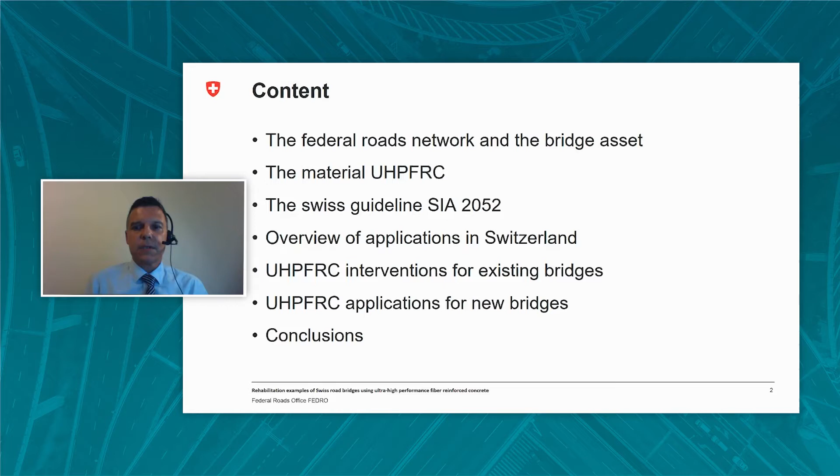I will start with a short description of the Federal Roads Network and bridge assets. Subsequently, I will present briefly some characteristics of the ultra-high performance fiber reinforced concrete as a building material and make a mention of the related Swiss standards. Thereafter, I will present some case studies concerning interventions in which this material was used for rehabilitation purposes. Finally, before arriving at the conclusion, I will present some perspectives of the use of this material for new structures.

In the illustrated map, you may see in green color the existing national road network, and in violet, the 400 kilometers of cantonal roads which were joined to the national network in 2020. The total national road network is thus actually 2,254.5 kilometers. In blue, the remaining parts to be constructed, which is about 33 kilometers. It is a quite complex network due to the particular topography of Switzerland and comprises 4,314 bridges, including flyovers and underpasses, as well as 320 tunnels.

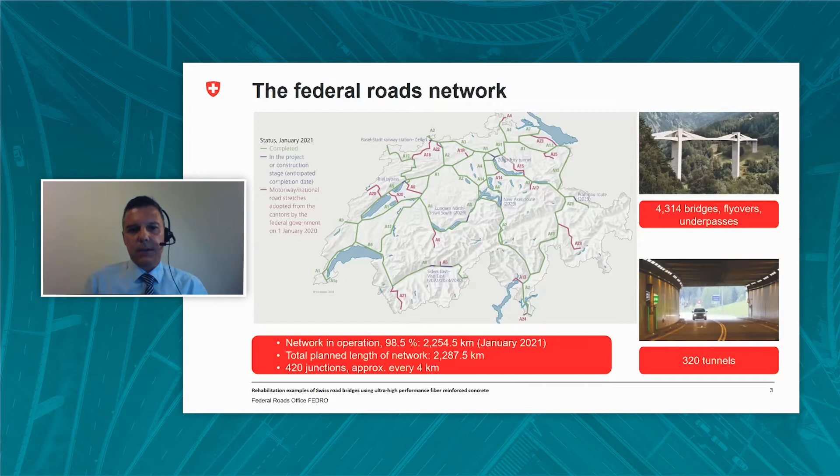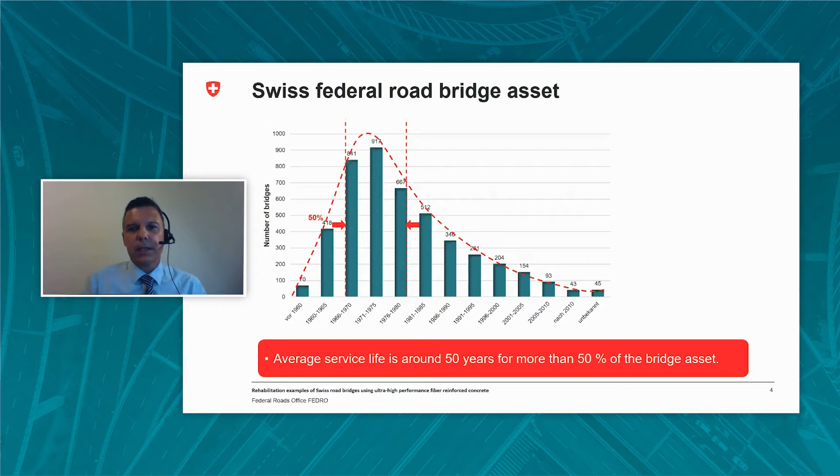Now, most of the Swiss bridges were constructed in the period from the mid-60s to the late 70s, so their average service life is around 50 years. Degradation process, increase of traffic load, especially heavy traffic load, as well as evolution of codes make it necessary to proceed regularly to important rehabilitation projects for several of these bridges. With an annual investment of around 1% of the replacement value, the bridges are kept in a good or acceptable condition. Concrete is the predominant building material in Switzerland for our road bridges.

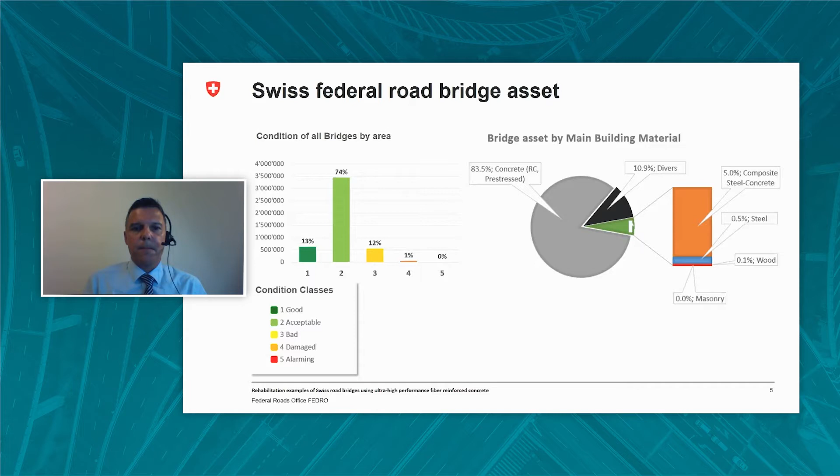83.5% of the total area of the bridge decks is associated to reinforced concrete or prestressed concrete bridges. However, despite the advantages that have led to the use of concrete as the main building material, the issue of durability was not thoroughly examined or taken into consideration in the past. A combination of factors such as exposure to corrosion, defective conceptual details, particularly at the abutments, presence of alkali aggregate reaction, carbonation, frost, use of de-icing solutions in winter period, and others have resulted in some cases in important damage, which normally should not occur during the design service life of a bridge.

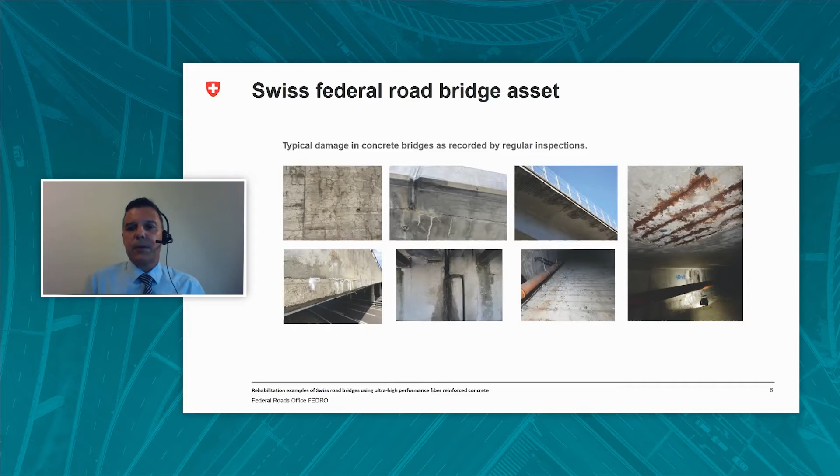For this reason, other materials, more efficient and more resistant to environmental influence, have been sought since the 90s. Such a promising material is the ultra-high performance fiber reinforced concrete. Now, this material is neither a concrete nor steel, but an advanced composite cementitious material with specifically tailored properties. That's the reason why several experts call it ultra-high performance fiber reinforced cementitious material instead of ultra-high performance fiber reinforced concrete. I rather agree, however, in this presentation I will use the initial nomination in English.

Now, the cement content is more than 2 times higher than for a normal concrete. For instance, for an ordinary concrete, the cement content is between 250 to 400 kilograms per cubic meter, whereas for the ultra-high performance fiber reinforced concrete, the cement content is 700 to 1,100 kilograms per cubic meter. It contains silica fume, which fulfills 3 functions. It fills voids between cement grains, it enhances their rheological characteristics, and forms hydration products by pozzolanic activity. Thus, the mechanical strengths are increased and microstructure and compacity of this material are enhanced.

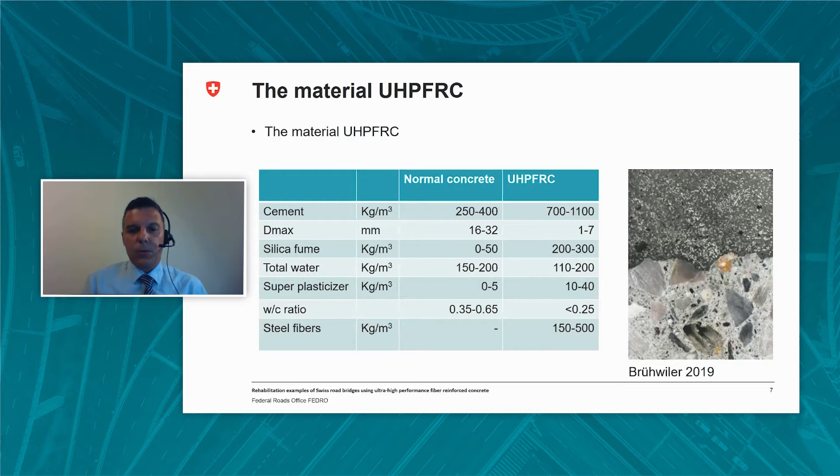The water-to-cement ratio in ultra-high performance fiber reinforced concrete is less than that of a normal concrete. In an ordinary concrete, the water-to-cement ratio is between 0.35 to 0.65, whereas in ultra-high performance fiber reinforced concrete, the water-to-cement ratio is less than 0.25. So, due to the low water content, superplasticizers are essential for the workability, and they are in much higher content than that for a normal concrete. A significant difference of the composition of this material in comparison to the normal concrete is the absence of aggregate. Quartz sand is used with particle size less than 1 millimeter in this material, whereas in ordinary concrete we have aggregates which can reach 32 millimeters. This is why we should not call it a concrete but a cementitious material.

Ultra-high performance refers principally to improved mechanical strengths, structural toughness, and durability. The typical behavior of ultra-high performance fiber-reinforced concrete in a uniaxial state of stress in comparison to other concretes is shown schematically in this slide. The diagram on the left shows the typical response in uniaxial tension.

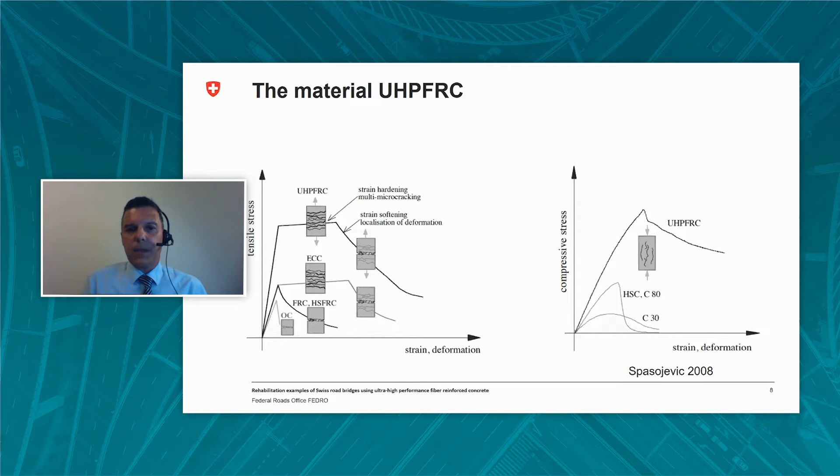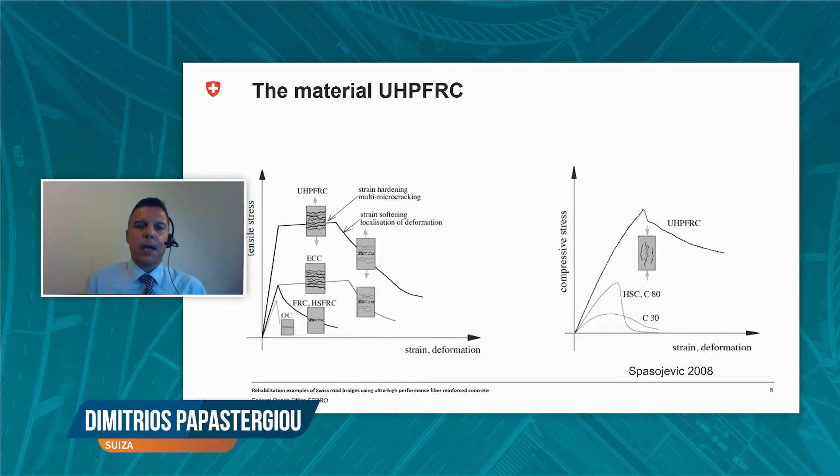In the left diagram, OC are the initials for the ordinary concrete. FRC are the initials for the ordinary concrete with fibers. HSFRC are the initials for the high-strength concrete with fibers, where ECC stands for engineered cementitious composites. As we can see, ordinary concrete has an abrupt failure in tension, whereas the concrete with fibers have a strain branch, but they don't present any strain hardening.

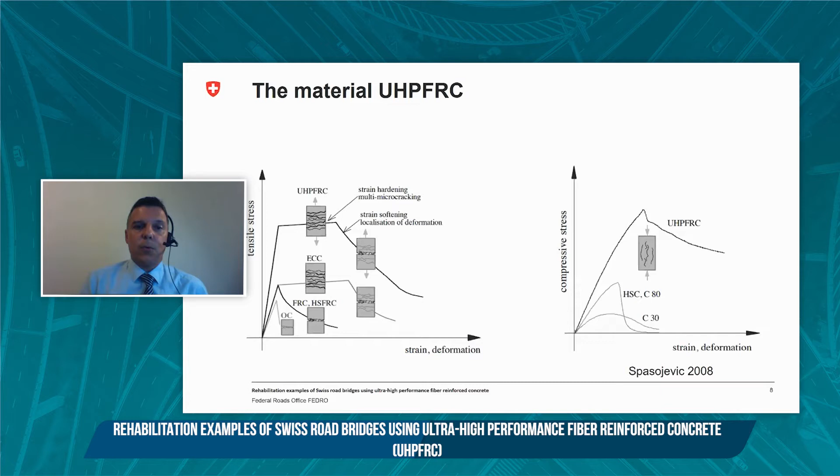The engineered cementitious composites and the ultra-high performance fiber-reinforced concrete are distinguished from other concrete with fibers as materials exhibiting strain hardening in tension. Moreover, for ultra-high performance fiber-reinforced concrete, the resistance in uniaxial tension is more than double in comparison with that of other concretes with fibers. The diagram on the right depicts the response in uniaxial compression. Ultra-high performance fiber-reinforced concrete is a material with a cement matrix of a characteristic compressive strength in excess of 150 megapascal, which is more than double that of a high-strength concrete.

Now, let's see in more detail the structural response in tension of ultra-high performance fiber-reinforced concrete and how it is different from that of ordinary concrete with fibers. For ultra-high performance fiber-reinforced concrete, in the first part of the curve until point A, the stress rise is quasi-linear and elastic until the cracking strength. After cracking, strain hardening takes place until point B, with post-cracking strength being higher than that of the cracking strength. Up to point B, multiple cracks are formed during the strain hardening.

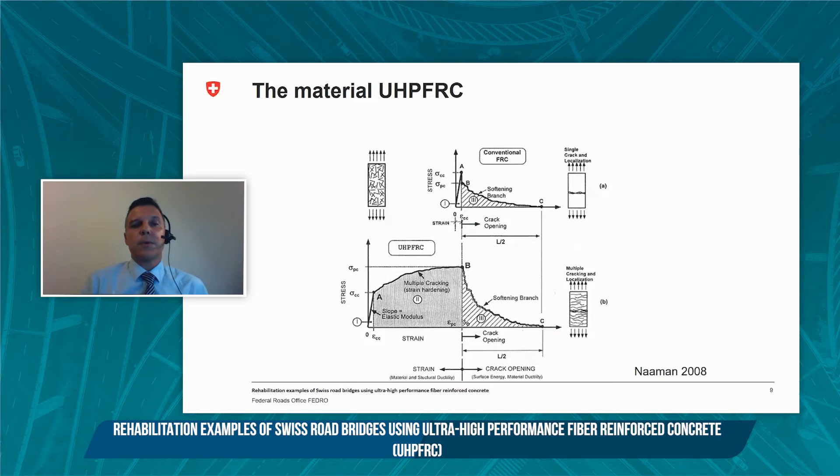fibers. They are characterized by the material, by its mechanical properties and their geometry. In order to enable the transfer of force with a small crack opening and to sustain tensile forces without breaking, a high modulus of elasticity and high strength are required. The modulus of elasticity of steel fibers is 200 gigapascal, and strengths are in the range of 1,000 to 3,000 megapascals, with a deformation at failure of about 3 to 4%.

Fiber content is usually expressed in terms of fiber volume fraction, representing the ratio between the fiber volume and the material volume, the latter being the matrix with the fibers. Fiber quantity varies in different types of this material, usually in the range of 1.5 to 2.5%, and in certain cases, for specific applications, it can reach up to 6%.

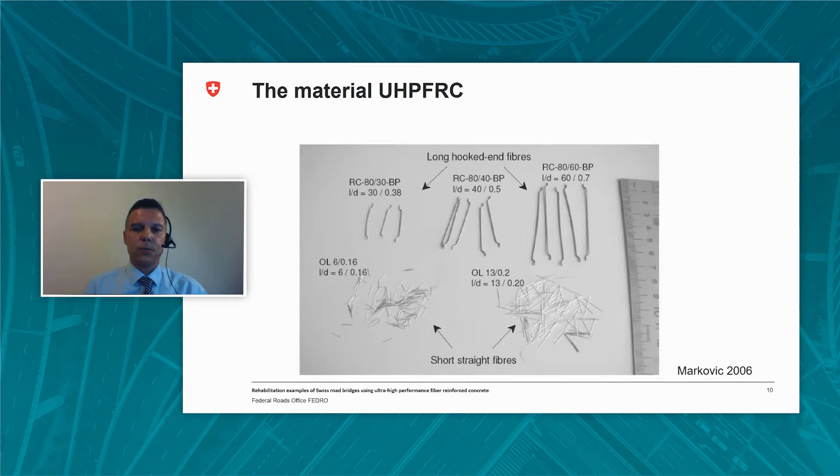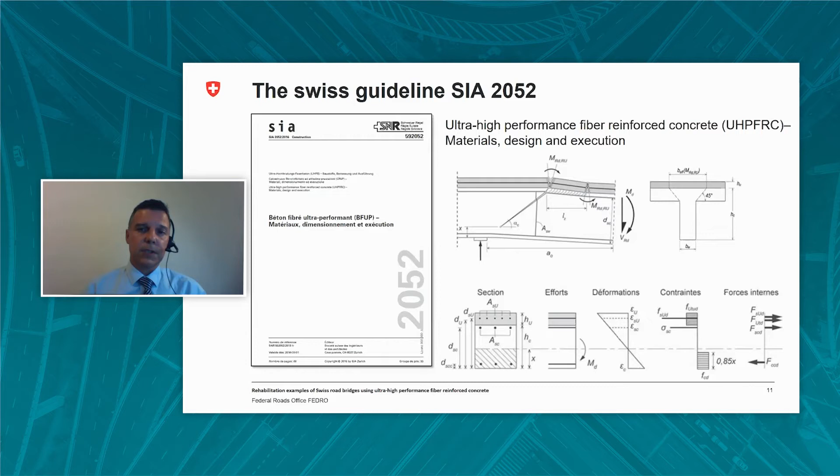For applications using ultra-high performance fiber-reinforced concrete, we use in Switzerland the recommendations of the Swiss rule SIA 2052 from 2016. This document does not have the status of a code yet, so it does not have an obligatory character. It handles several issues, such as the material properties and the constitutive laws. It also provides guidelines for design, such as shear, bending moment, and others. This manual, which is currently under revision, also provides constructional features and dispositions, such as the sealing of the working joints. It defines the tests which are required to verify the material properties.

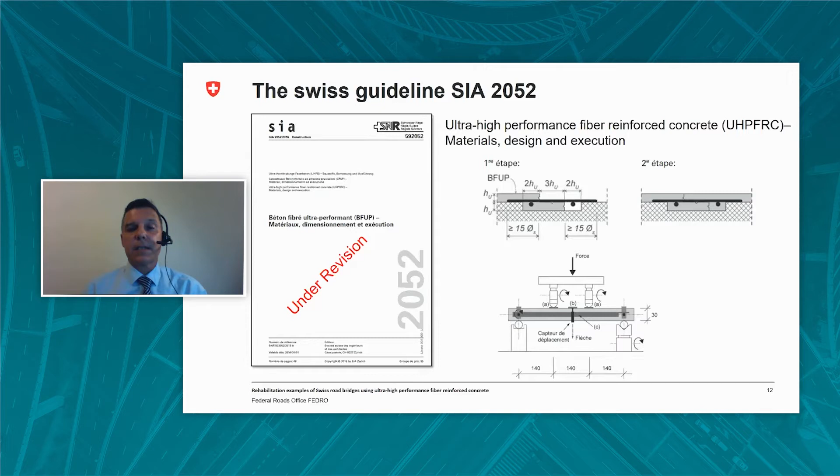A very useful piece of information is the criterion for the sealing properties of the ultra-high performance fiber-reinforced concrete. Based on experimental investigation, it was found that as long as the tension strain in this material remains in the serviceability limit state lower than 0.1%, 1 to 1,000, the sealing properties are maintained. This is of extreme importance since it allows, when designed so, avoiding the use of complementary layers of traditional sealing for the decks of bridges and thus avoiding unnecessary costs and delays during an intervention.

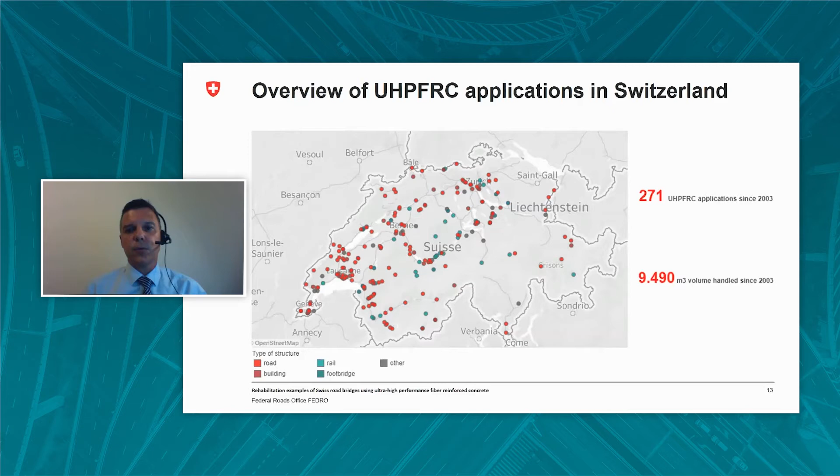Since 2003, Switzerland counts more than 270 recorded applications with this material. This corresponds to a total volume of more than 9,490 cubic meters. It's worth mentioning that more than 80% of these applications concern rehabilitation or retrofitting projects of road bridges, federal and cantonal. In the following slides, I will present a few of those case studies. Now, the Chillon viaducts are two parallel highway reinforced concrete bridges, each carrying one direction, opened to traffic in 1969 and located on the shores of Lake Geneva near Montreux in Switzerland.

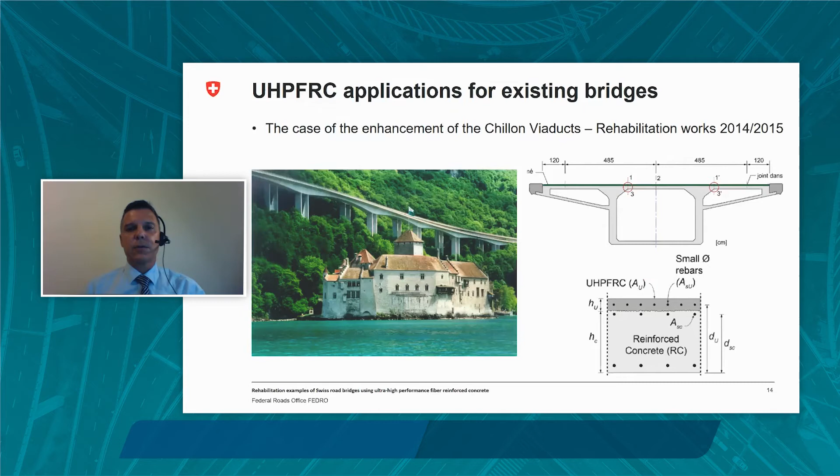They consist of variable height box girders by post-tensioning segmental construction with epoxy glued joints and spanning between 92 and 104 meters at a total length of 2,120 meters. In 2012, during rehabilitation works on the viaducts, early signs of the alkali aggregate reaction were discovered in the concrete. In later stages, this reaction could lead to deterioration of the concrete compressive strength, which would mean an insufficient structural safety for the resistance of the bridge at ultimate limit stage and even worse at serviceability limit stage.

It was thus necessary to develop a concept for rehabilitation and strengthening to protect the concrete from water ingress, slow down the rate of alkali aggregate reaction, and increase the ultimate resistance and stiffness of the deck slab and girder in view of potentially reduced strength and modulus of elasticity of the existing concrete. Such an intervention had to be cost-effective in terms of direct construction costs and also of user costs. It also had to preserve the form and hence respect the cultural value of the bridges.

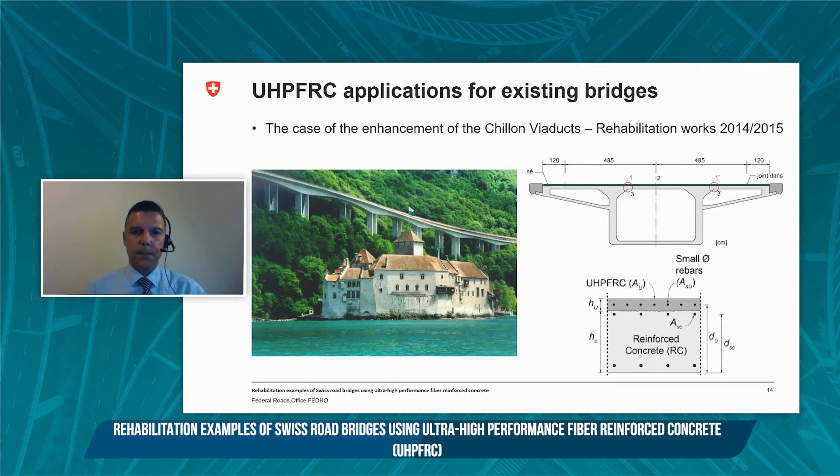The chosen strengthening concept was adding a layer of ultra-high performance fiber reinforced concrete, additionally reinforced with steel rebars in the two directions, longitudinal and transversal, also serving as a waterproofing layer. The new 45 millimeter thick layer on the bridge deck provides an effective and significant improvement of the structural performance of these viaducts. By casting one layer of ultra-high performance fiber reinforced concrete on the deck slab with rebars in the transverse direction and in the longitudinal direction, the following beneficial effects were achieved.

Increase of the deck slab's ultimate resistance in the transverse direction in bending and in shear. Increase of the deck slab's stiffness to enhance the serviceability of the slab and the fatigue safety of the existing reinforced concrete elements in view of future high traffic demands in number of vehicles and axle loads. Increase of the hogging bending moment resistance and the stiffness in the longitudinal direction of the box girder. Provide waterproofing to protect the existing concrete of the slab from water ingress and thus limiting the further development of the alkali aggregate reaction. Limit duration and cost of the intervention by realizing all the above listed requirements and structural factors by casting of just one layer of ultra-high performance fiber reinforced concrete.

For this purpose, a machine was developed specifically for the casting application of this material, and the quantity of it was 1,125 cubic meters for each of the 2 kilometer viaducts. The casting took place in July 2014 for one of the bridges and in June 2015 for the other bridge. And the intervention cost was 200 euros per square meter of deck surface, 50% of it being the cost of the material itself.

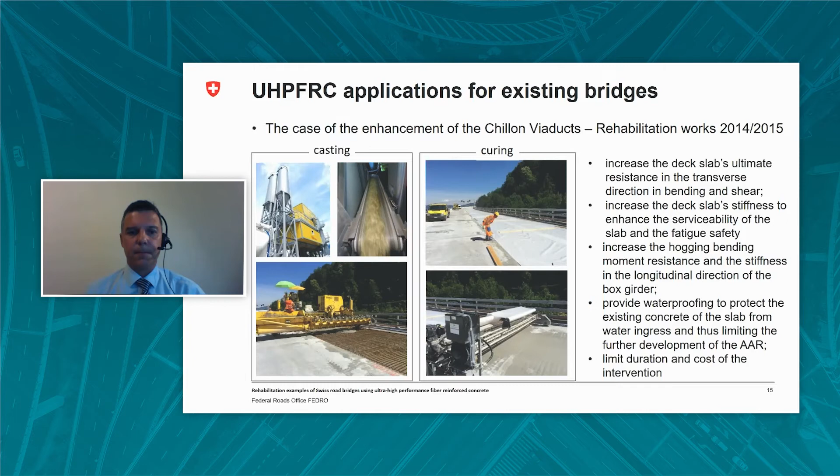Now, let's see more in detail the obtained increase of the bending and the shear resistance of the slab in the transverse direction. The Chillon viaducts deck slab has a total thickness of 180 millimeters. The transversal 16 millimeter diameter top steel rebars are placed at the height of 152 millimeters from the intrados, and they are spaced at 12.5 centimeters. The center of these rebars is at 60 millimeters only from the top of the concrete.

Considering now a future reduced strength due to the alkali aggregate reaction of the concrete limited to 20 megapascal, the maximum resistance for the section 1 prime here on the cantilever is equal to 165 kilonewton meter per meter. This is 73% higher than the resistance of the reinforced concrete itself in the stage before the reinforcement. For positive bending moment, the layer of the ultra-high performance fiber reinforced concrete is in compression and mainly contributes to the resistance by reducing the height of the compression zone and thus increasing the static height. For the case considered here, the positive bending resistance at the section here in the middle of the slab is increased by 33%.

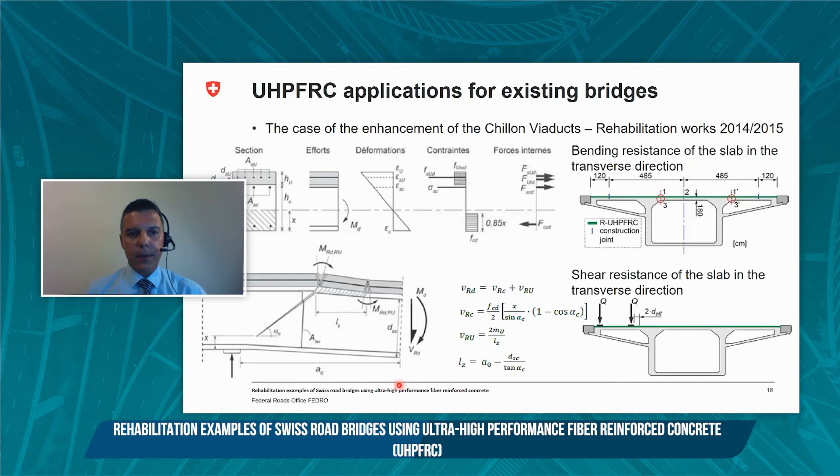The length of this zone is estimated from the mouth of the inclined crack to the position of the concentrated load. It thus depends on the angle of the inclined shear crack and on the length of the shear span. For the present slabs, the shear span corresponds to the distance between the side of the concentrated load and the web of the box girder. It is equal to twice the effective flexural depth of the composite section, as shown here for the cantilever slab.

With an angle of the inclined crack estimated at 35 degrees, the shear resistance of the composite section is 265 kilonewton per meter. The contribution of the ultra-high performance fiber reinforced concrete to this resistance is about 1/3 of the total resistance. The study has shown that in this particular slab, the flexural failure mode is much more likely to occur, also in the case of shear-prone loading situation.

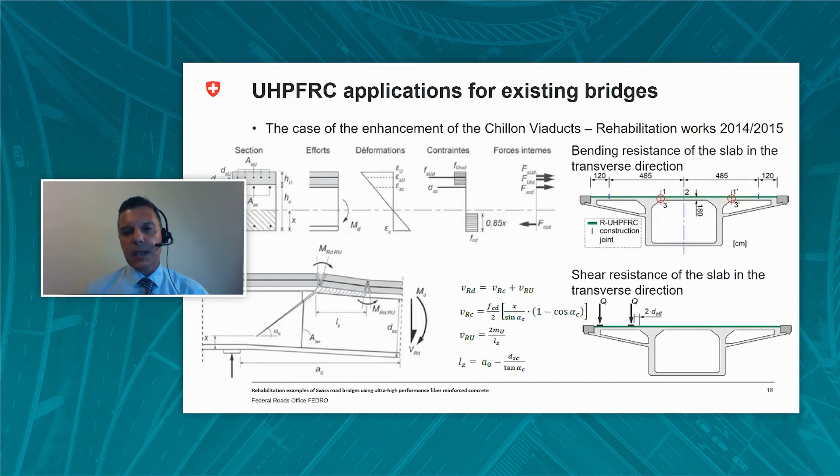Now, the aforementioned project of the rehabilitation of the Chillon viaducts by means of ultra-high performance fiber reinforced concrete received an excellence award from the American Concrete Institute.

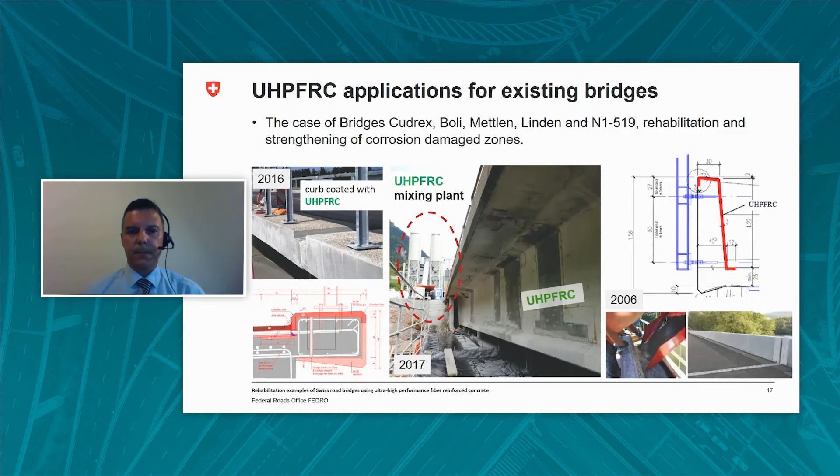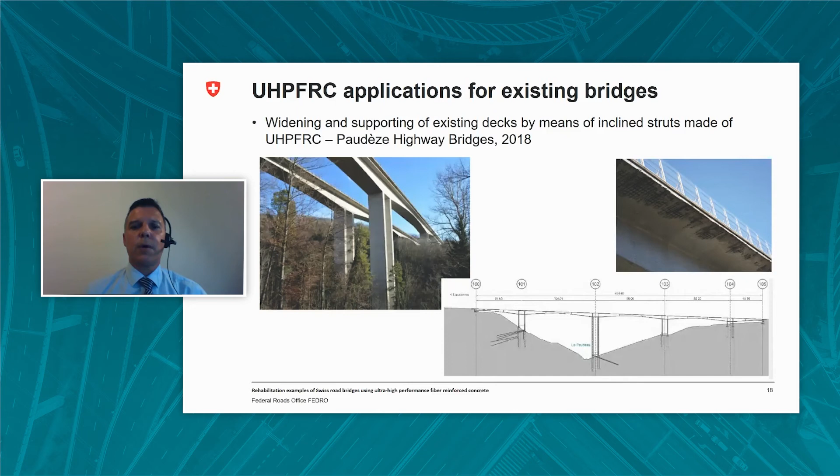The latest inspections have revealed several damages. More precisely, concerning the slab, the cantilevers were found to be in poor condition, with spalled concrete and corroded steel reinforcement on all edges. Furthermore, future requirements for diverting the traffic during important rehabilitation work on the highway necessitated widening of the deck. Any possible intervention also had to take into account the replacement of the curbs by concrete crash barrier walls for enhanced security against lateral shock.

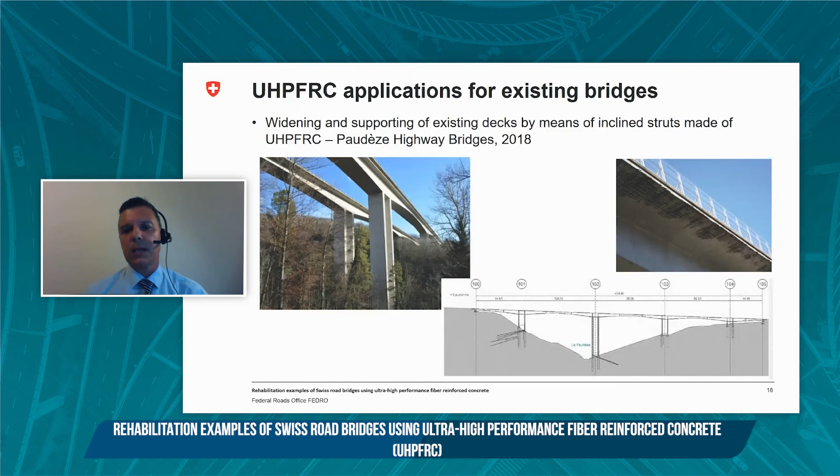The solution proposed was to widen the deck slab by ordinary reinforced concrete and support its widened cantilevers with struts, allowing to maintain the existing steel reinforcement in the slab and thus minimizing the intervention on the deck. The struts were made of ultra-high performance fiber reinforced concrete to minimize their weight and to avoid their future maintenance, which would be the case if they were made of steel. In total, 816 such inclined struts of 5 types were produced.

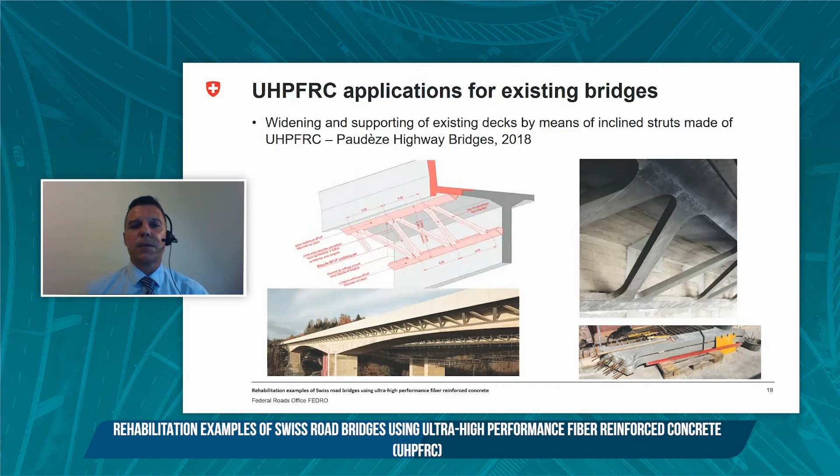The ultra-high performance fiber reinforced concrete struts were prefabricated, allowing thus to reduce their cost to 500 Swiss francs per unit, whereas the joints with the web of the longitudinal girders and the cantilever slabs were assured by cast-in-place ultra-high performance fiber reinforced concrete. Prior to construction, several configurations of the prefabricated struts were tested in the laboratory. This allowed to verify the allowed eccentricity during execution and mounting of the struts, which is found to be 1 centimeter.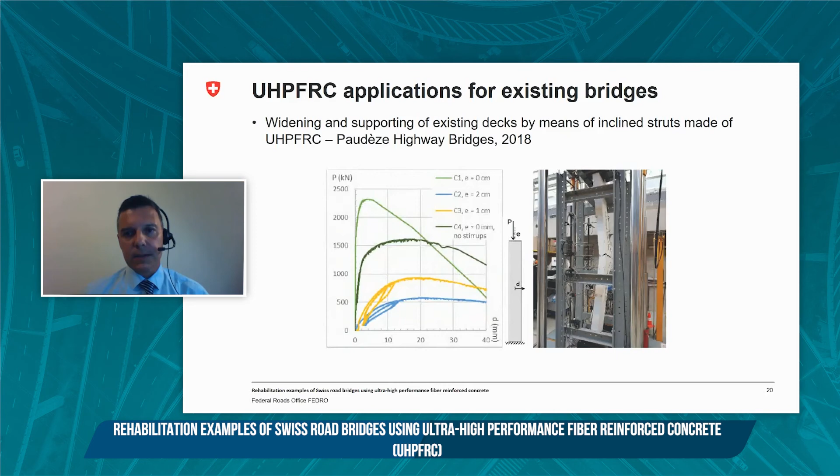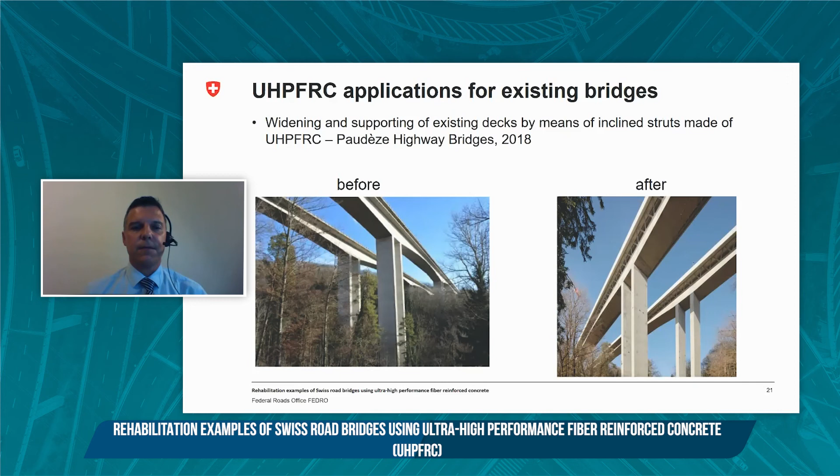After realization, it was apparent that the inclined struts of ultra-high performance fiber reinforced concrete maintained consistency with the existing concrete and the geometrical form of the existing structure, preserving thus the cultural value of it. Now, the previous example shows how ultra-high performance fiber reinforced concrete can be used as building material for structural members destined to rehabilitation interventions. Other such members are the crash barriers or curbs on the edge of the cantilever slabs.

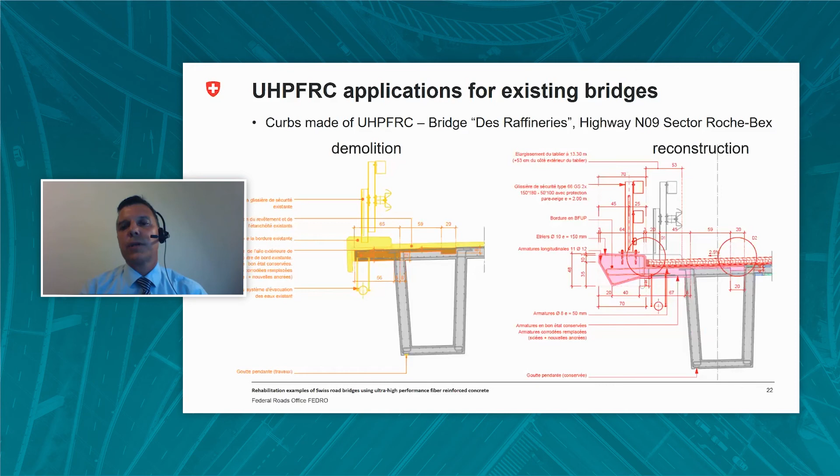This can be the case when, for instance, the existing curbs are highly deteriorated and need to be rebuilt partially or even totally. Applying a life cycle cost analysis, it can be proven that the use of ultra-high performance fiber reinforced concrete instead of ordinary concrete is more economic and technically efficient. This is the case of the reconstruction of the curb and the part of the slab of the bridge des Raffineries in the Highway 9 shown in this slide. The project is under call for tenders for works.

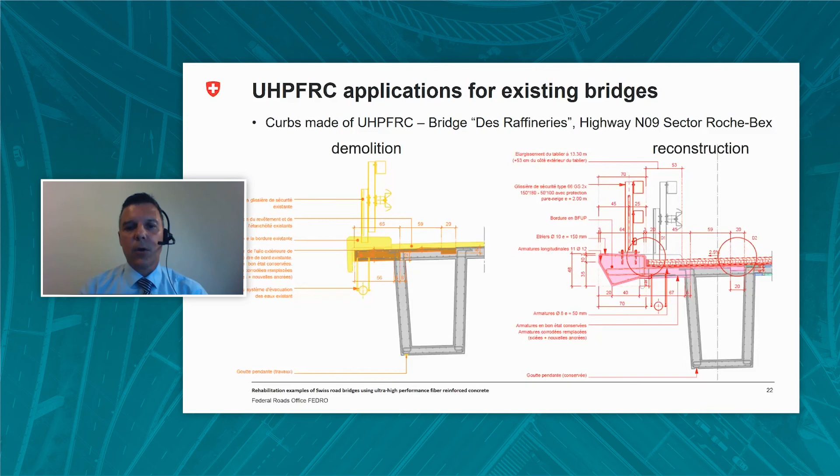Now, in the cases when retrofitting and rehabilitation costs are high, and the retrofitting results somehow questionable due to the missing precision of the quality and the state of the existing remaining materials, a replacement of a bridge by a new structure can be an alternative solution. It is the case actually of several overpasses on the Highway 1 between the cities of Lausanne and Geneva. These overpasses were built in the early 60s.

They present 3 spans, the main span supported by inclined struts. They are made of pre-stressed and reinforced concrete and are a type of integral bridges. The inclined struts and the deck are linked together, but also to the inclined abutments. Despite their very efficient static system, because it diminishes the span, these bridges are in a very deteriorated state due to defective sealing. Furthermore, they were not designed to stand the heavy traffic of today. Rehabilitation and retrofitting becomes extremely expensive in such a way that reconstruction seems to be a more efficient solution.

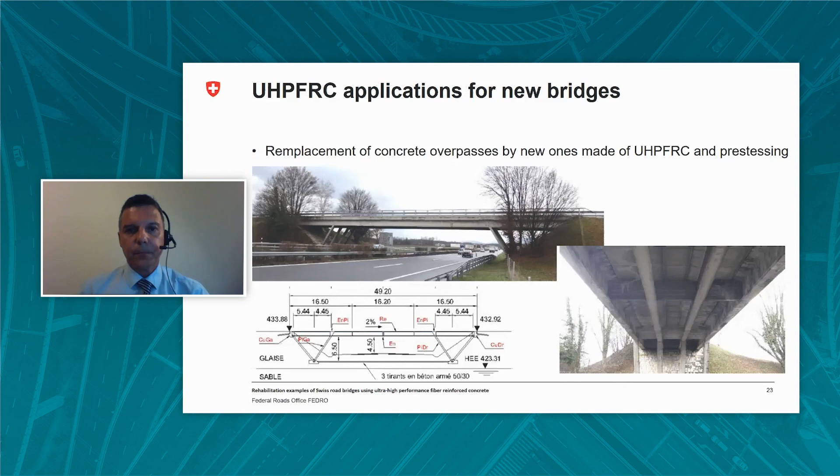In such a case, it's worth evaluating through a life cycle analysis whether the use of prefabricated bridges made of ultra-high performance fiber reinforced concrete can be the optimal solution. The slide shows here the concept of such a new overpass over the highway in the community of Bursins. The overpass consists of ultra-high performance fiber reinforced concrete girders with pre-stressing and abutments made of ordinary reinforced concrete. The new bridge is integral with one clear span of about 42 meters.

The project is still under development phase and should conclude to optimization of the ultra-high performance fiber reinforced concrete pre-stressed girders, since the preliminary design is by its nature somehow conservative and does not allow to take advantage of the enhanced mechanical properties of this material. For instance, the actual design contains stirrups, shear reinforcement, which can be avoided. Overpasses built elsewhere in the world, like in France, present ultra-high performance fiber reinforced concrete girders, which carry the shear force by the contribution of the shear resistance of this material and by the contribution of the post-tensioning. The detailed project of the aforementioned case study is expected to be delivered during 2022.

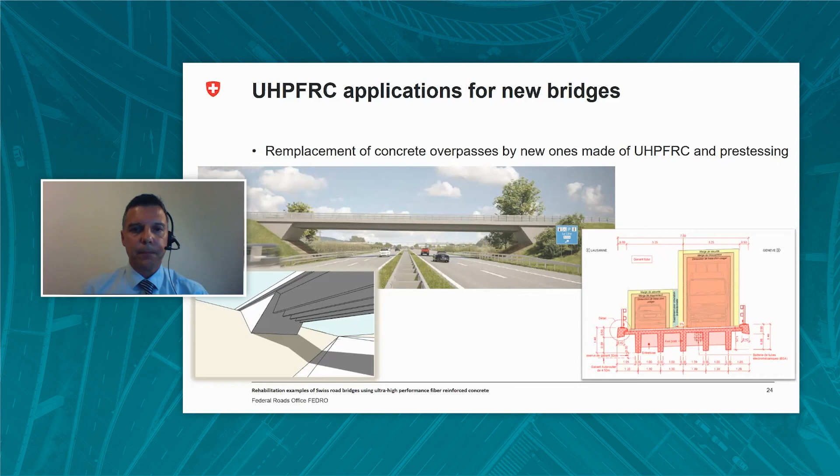After all the above information, we may arrive to the following conclusions. Ultra-high performance fiber reinforced concrete is a building material with enhanced mechanical characteristics in comparison to ordinary concrete or to ordinary fiber concrete. Due to its sealing properties and high resistance against corrosive agents, it is suitable for rehabilitation intervention for bridges. Standardization and prefabrication may help to reduce its high production costs.

Ultra-high performance fiber reinforced concrete can be used both as building material for reparation and reconstruction locally of hybrid members, as well as a substitute to ordinary concrete for building new elements or even new structures combined with pre-stressing or steel construction. Despite its high production costs, it should be examined as an alternative to ordinary concrete under, of course, a life cycle analysis.